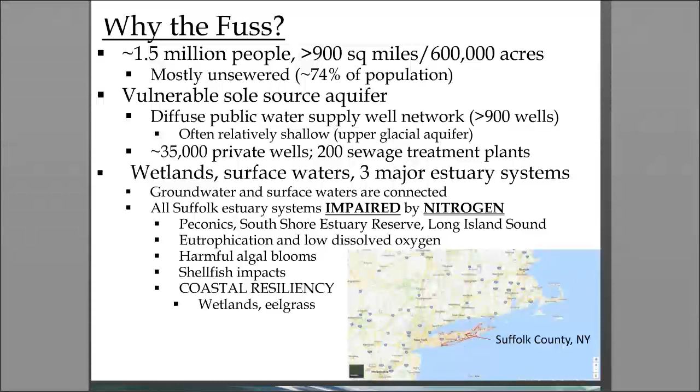And as these articles indicate, Suffolk County was being pushed by both the state and federal governments to move towards sewering of the entire county. And in fact, elected officials at that time began taking steps to move in that direction. Those steps became very complicated for a variety of reasons. One reason was that, rather than just put in place the sewer systems, given the potential cost impacts to homeowners, the elected officials decided it would be necessary to put any proposal for the creation of a sewer district and the installation of a sewer system up to a vote for the county and the affected areas in particular. And their very first effort to do that didn't turn out so well.

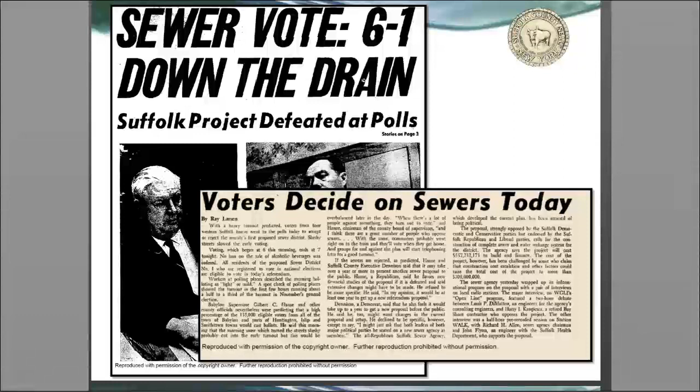It deals with a wide variety of issues. It was completed under the leadership of Walt and his staff in the Health Department, with financial support from the Suffolk County Water Authority and important input from our Department of Economic Development and Planning. It deals with a wide variety of potential threats to water quality. The one we're going to talk about today, and which has been the focus of our Reclaim Our Water initiative over the past couple of years, is the issues associated with nitrogen.

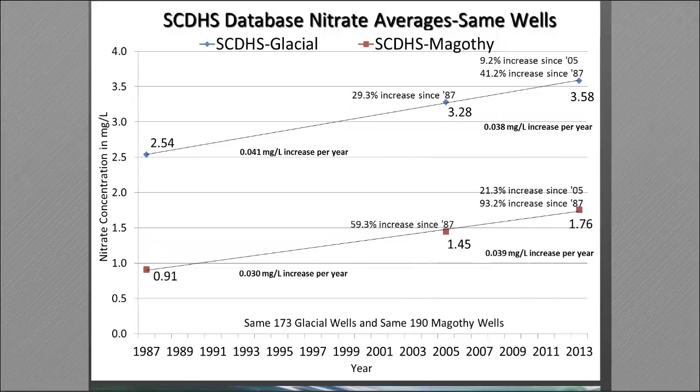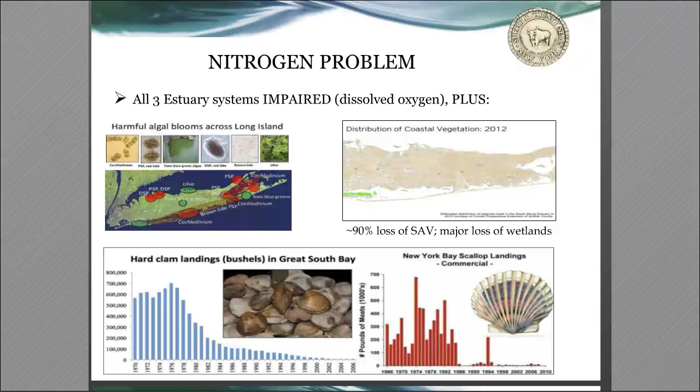Fish kills are sometimes a result of natural conditions, but that fish kill, which occurred in the summer of 2015, was studied by our Suffolk County Department of Health Services and the New York State Department of Environmental Conservation, which concluded that it was a result, at least in part, of increased nitrogen pollution in the Peconic Bay, Great Peconic Bay or Peconic Estuary.

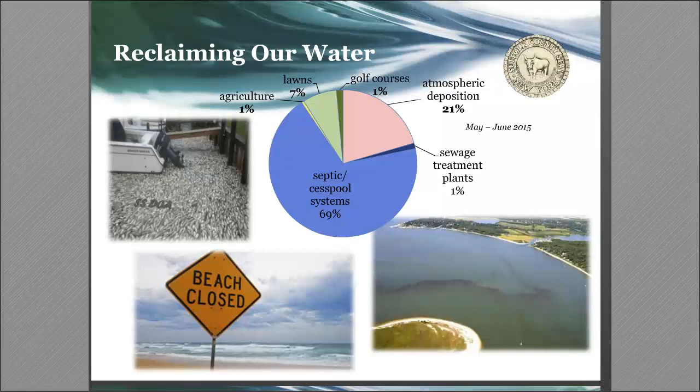And approximately 250,000 of those systems predate a 1973 requirement that a homeowner or a developer install a septic tank in front of a leaching ring in order to provide some pre-treatment of wastewater. So we have 250,000 systems in the ground in residences alone that don't even have the benefit of a septic tank. The numbers are daunting, and sometimes people will question whether or not we could ever really make a difference.

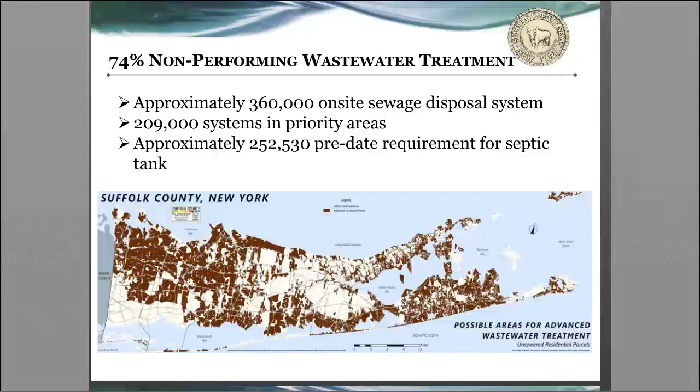The county executive has made clear that what we are going to do is to establish priorities in terms of areas where the use of new technologies will make the most difference and be most cost effective. Walt's going to talk a little bit about that on the sub-watersheds plan, and the county executive has directed that we should make progress each and every year toward that goal, not be daunted by the large numbers.

Or if we have a pre-existing downtown business district where the use of cesspools and septic systems is constraining growth or future development and impacting the environment, we see some interest in providing active sewage treatment there. But for many areas of Suffolk County, which is a very diverse county, a fully developed suburb on its western boundary, and increasingly more rural as you move east towards the Twin Forks of Long Island, which are still very rural. In areas where development patterns are less dense, sewering is just not a cost-effective option.

We find that in some cases the cost to sewer an individual parcel could exceed $100,000, and there's tremendous concern on the part of some of the governments and the NGOs on Long Island that the introduction of sewering to some of the rural areas will actually induce development that would be inconsistent with their land use plans and goals. And in communities like that, the solution, rather than sewering parcels that are now relying on cesspools and septics, is to move instead towards the use of these new innovative alternative treatment technologies, which we'll talk about more in the presentation.

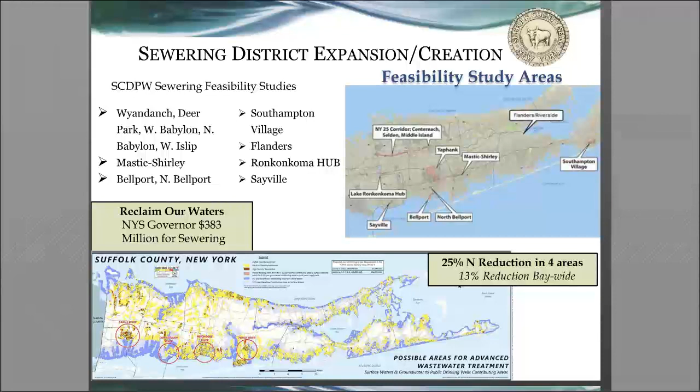So we are advancing some sewer proposals across Suffolk County. And then the map on the right-hand side shows other areas in which there's tremendous interest on the part of the citizenry and elected officials to advancing sewer, and efforts are underway to evaluate that as a possible solution to the wastewater crisis that we're facing.

But IA systems are the real focus of the work that we'll be talking about today. And what I found when I arrived at Suffolk County is that it's not such a simple matter. The county executive quickly realized that in order to put these facilities and these types of systems into the ground, there would need to be a series of steps taken to make sure that the county was successful and that the process would be supported and embraced by citizens.

The very first, on the far left of this slide, is the idea of a pilot program to show that these technologies actually treat wastewater as effectively as advertised. And we'll talk about that in a little bit more detail, but the short story is that the county went out to the industry, to all manufacturers of these systems that they could identify, and basically said any manufacturer can participate in a program. We're Suffolk County. We have 360,000 residential systems in the ground that could ultimately need to be replaced. We're a major potential market for your product. Would you be willing to invest in the future of Suffolk County by donating systems to show that they function the way that you advertise them?

4 manufacturers responded positively to a first round of that program and donated 6 different technologies. The county held a lottery of interested homeowners and put 19 systems in the ground to test those, hoping that after getting 6 months of steady operating data showing they performed down to regulatory standard 19 milligrams per liter of total nitrogen or less, we would certify those provisionally for use in Suffolk County.

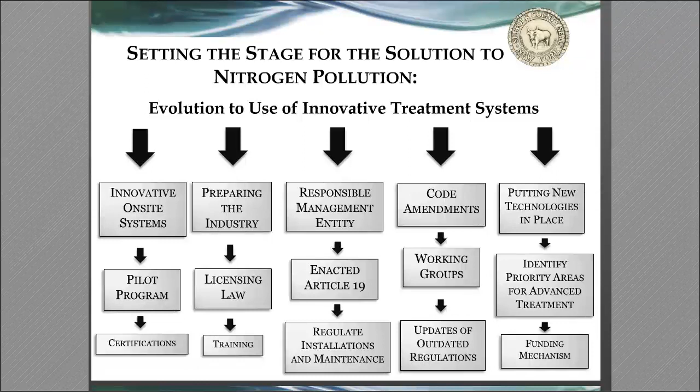So our program is called the Suffolk Cesspool Upgrade Program Enterprise, or SCOOP. And we've been extremely fortunate to get significant financial support from the state of New York. Each and every year, we have been able to rely on them for funding that allows us to employ staff who are administering the programs and to support various aspects of our regulatory efforts as well.

State DEC has been very nimble. Every once in a while, we'll have an interaction with elected officials that causes us to need to pivot quickly and propose to fund something different than what has originally been proposed. And they have been with us every step of the way. We're very fortunate. So this slide just lists some of the things that we have going on, some of which I have mentioned. I'll try and move through these a little bit more quickly.

And now I'd like to turn it over to Walter to talk a little bit about the Sub-Watersheds Wastewater Plan. Walt? Yeah, thank you, Peter, and thank you, Zach and Christina and EPA and everybody for participating. It's an honor to present.

I sit in the Division of Environmental Quality in the Health Department. We've had a long involvement in wastewater under a couple of state codes. One of them is a state sanitary code under state health department jurisdiction. That basically deals with small flows of under 1,000 gallons per day, which is most of what you're going to be hearing about today. We also have delegated authority from our State Department of Environmental Conservation to implement the State Pollutant Discharge Elimination System Program under EPA's Clean Water Act and the State Environmental Conservation Law.

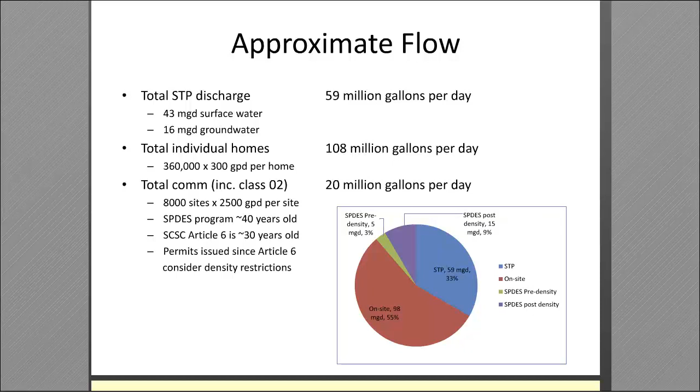The point of the graphic is to illustrate in the red that the great majority of loading is from individual on-site systems and particularly individual residences. There is a significant commercial flow dimension. It's on the order of 10 to 20% of the wastewater, but we're largely a residential community and a residential wastewater generator, and that's the biggest part of the problem that we need to come to terms with.

TMDLs of about 50% for the Sound study were mainly met with point source upgrades. In areas like the Peconics, we were talking about 25 to 50% reductions, mainly from non-point sources, mainly from septics. Those just haven't happened, and they need to.

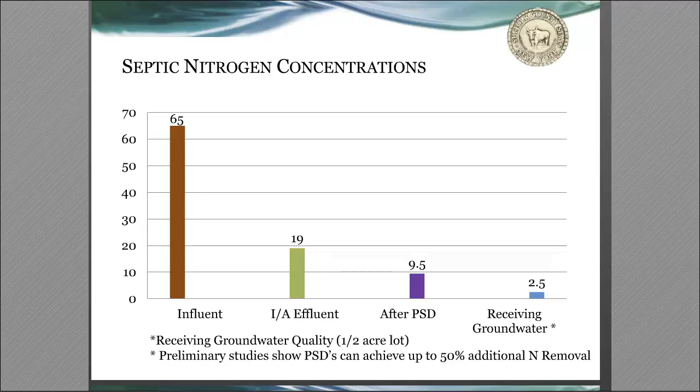This shows what we're dealing with in terms of septic loadings on a concentration basis. Septic tank influent, we rated about 65 milligrams per liter. Innovative and alternative effluent, this 19 milligram per liter number is based on New England standards. It's about a 70% reduction, actually higher because we're seeing higher influent numbers given low flow plumbing fixtures over here. With the pressurized shallow drain field, we hope to cut that in half, which means that in receiving groundwater, we'll be looking at about a 2 to 2.5 part per million nitrogen level, which is pretty consistent with some of the goals in prior studies in the literature to significantly change the trajectory of the loading and the impacts to our surface waters.

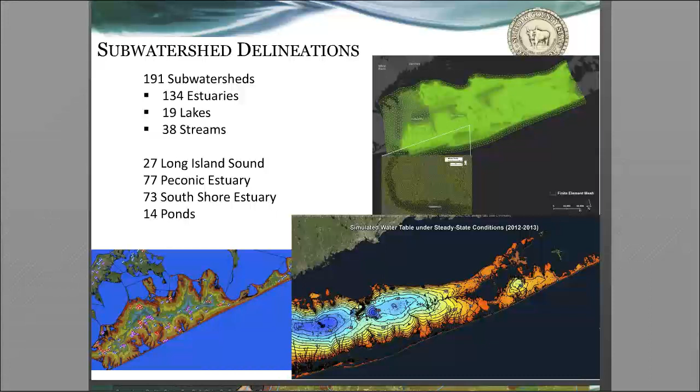Here are some good-looking maps, which are also very useful. The one on the lower left shows travel time to embayments as a function of land and travel time. We have 191 embayments delineated for our three major estuary systems as well as our freshwaters. Zooming into West Neck Bay, which has historically been an incubator for the brown tide, we're looking at groundwater coming in mostly in the 0 to 2 and 2 to 10 year travel time, which is the red and the orange. The model has the capability, and it's used to overlay each and every parcel and assign nitrogen loadings to it in existing and future scenarios.

It also partitions volumetric flow rates of groundwater inflow and nitrogen loading. So right now our assumption of 25-year travel time is being the most sensitive, with an aggregation of a number of these subwatersheds where we found that most of the groundwater and nitrogen to our sensitive bays came in within a 25-year travel time.

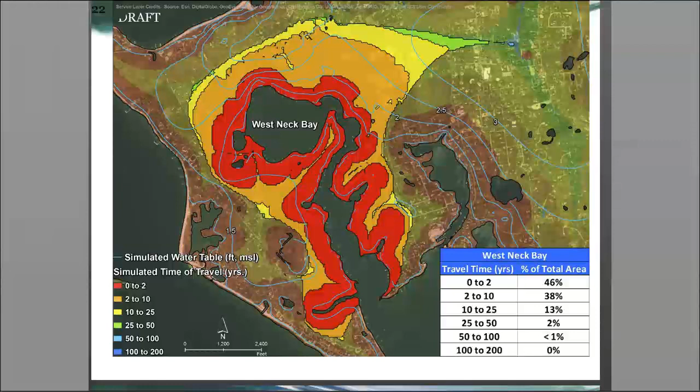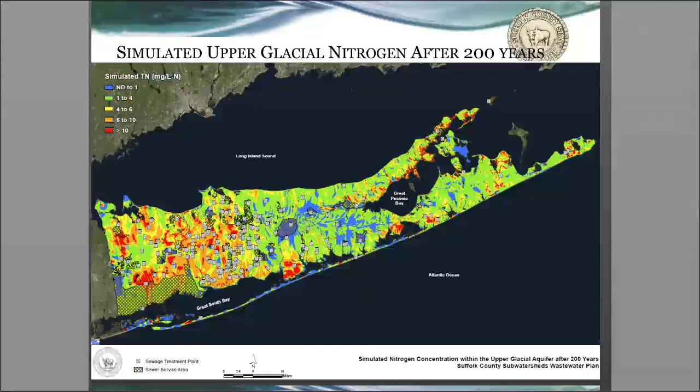Suffolk County developed largely between the 50s and 70s with exponential land use and residential unsewered development. We thought that by now some of the nitrogen concentrations would be leveling and flatlining, given that 50-year travel time. There's still enough residual legacy and new nitrogen coming into the system that hasn't happened. Nitrogen rates are continuing to go up, which, as Peter mentioned, is a huge concern.

I wanted to mention a word. Peter mentioned DEC's leadership and support with respect to grant funding and the Nitrogen Action Plan. EPA has been a huge leader with management models and case studies. They've led the Sound Study as well as the Peconic Estuary Program and funded various demonstration programs and wastewater management programs throughout the Mid-Atlantic and New England.

The Chesapeake Bay Data Sharing Agreement was an important seminal model. We've recently established the New England Long Island Data Sharing Agreement, which is going to give us better access to data and swifter approvals of technologies, which has been one of the rate determiners in getting this program to progress.

The Nitrogen Sensor Challenge is another important initiative led by Christina Heinemann and Maggie Thoreau and others at EPA. They've recently identified several winners in their phase 1, which are being tested in Massachusetts and are going to be purchased and used in Suffolk County. To reduce cost to the industry, it could save $50,000 or more that a company would otherwise have to invest in getting a technology from provisional to general use approval.

It's going to improve the quality of data, streamline reporting, and provide real-time information necessary to enhance performance. So we're very excited about this project and look forward to it moving forward.

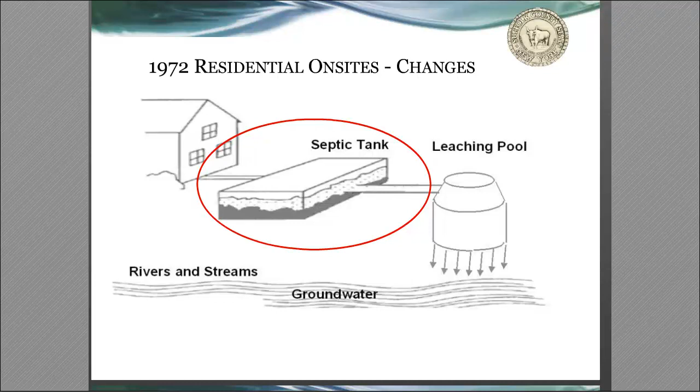They cave in. They do very little to treat wastewater other than converting ammonia to nitrate when they're not sitting in groundwater. Adding a septic tank was basically primary settling and treatment and retention of solids. Between 1972 and 2016, this was really the only option for residences without sewers available to them. Peter, did you want to pick up the sanitary code changes?

All right, Walt, thanks for that. Thanks for handing it off.

So, yeah, I had mentioned earlier that one of the things we needed really to do to lay the groundwork for an evolution away from the use of cesspools and septics to these new technologies was to designate our Department of Health Services as a responsible management entity, and the addition of Article 19 to the Suffolk County Sanitary Code in August of 2016 accomplished that, and also established a performance standard for IA systems of 19 milligrams per liter.

That was an important step, but we have a lot of other steps to take because as things stand, the sanitary code still allows the installation of traditional conventional septic systems for single-family development. But Article 19 was an important step. As I indicated, it did a number of things for us, as indicated in this slide.

It authorizes our department, importantly, to promulgate procedures, protocols, and standards, which they've been doing ever since Article 19 was enacted, and empowers the department to oversee installation and maintenance, and we have a lot of things underway trying to give life to that responsibility. We'll talk a little bit about our longer-term plans for a kind of a computerized system for reporting. It's very exciting. It's a very big deal.

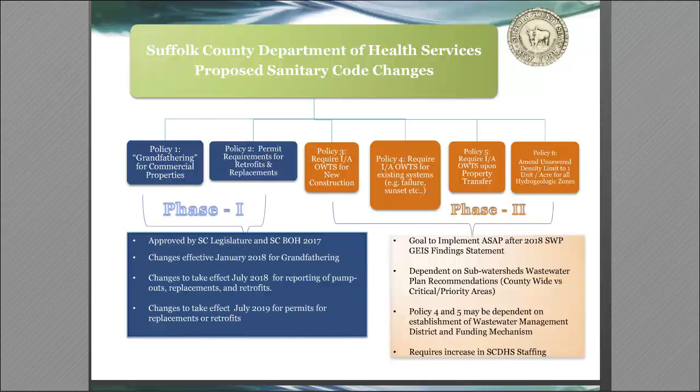One of the things that our first phase of modification of Article 6 did was to kind of restrict the way that we deal with pre-existing non-conforming flows. Walter and his staff kind of pulled apart the past practice of the department and the applicable regulations, didn't really like what they saw, and so we were able to include some modifications to what we call the grandfathering provisions in the update to Article 6 that was approved by the legislature. Walter felt very strongly about that, and it was supported by the Long Island Builders Institute, which we were pleasantly surprised.

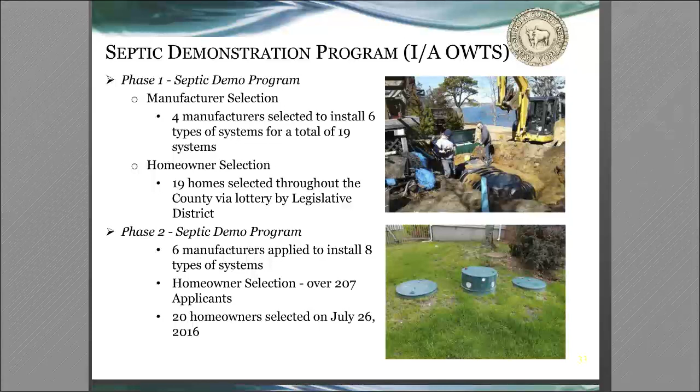So as Peter mentioned, between phase 1 and 2, we have 14 different technologies which are being tested. We're also testing a pressurized shallow drain field, our first effort at horizontal leaching in the shallow zone with enhanced wastewater treatment for nitrogen and other contaminants. So far, we have 3 experimental systems. We have 5 provisional systems approved, which is really the important thing.

Out of the 14 systems that came to us to be demonstrated, we set up challenge performance criteria. They needed to come to steady state. We needed 6 months of performance data. We needed to be sure that their engineering report was acceptable, that the community was capable of installing, operating, and maintaining those.

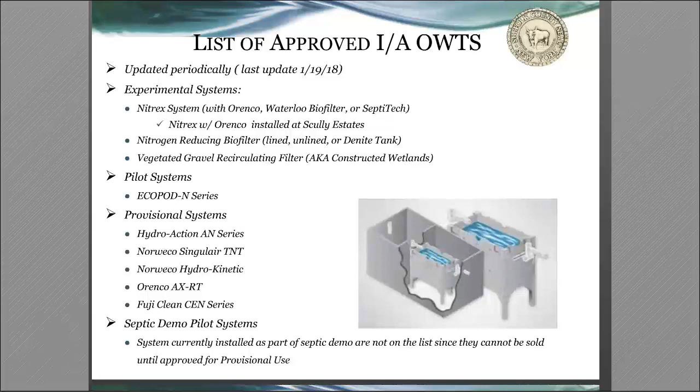5 of those, a HydroAction, 2 Norwecos, an Orenco, and a Fuji system, are already certified for provisional use, which means that as long as they continue to perform, there's no limit on the number that can go in the ground. If there's any problem, we can obviously suspend approval for installation. That hasn't happened yet, and we don't expect it to happen. The other 9 systems are still in the process of being vetted.

So here are the 5 systems that were approved. These are all biological systems. There are systems out there that rely on more chemical and physical processes. These are fairly conventional mini sewage treatment plants, ammonia to nitrate in the presence of oxygen in a food source, then again nitrate to nitrogen gas in the presence of anaerobic denitrifying bacteria.

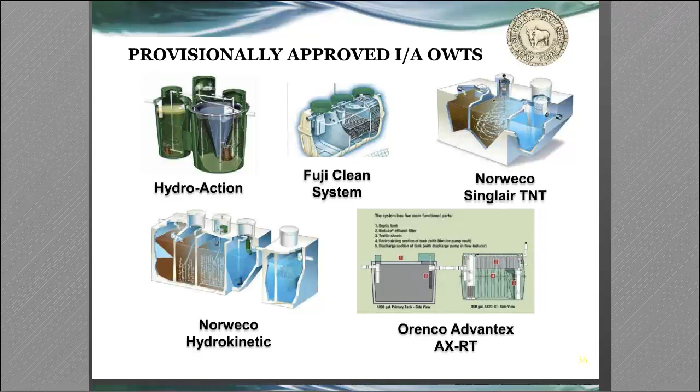Some of these are recirculating systems. The HydroAction, the Orenco and the Fuji all recirculate back to a septic tank or a septic chamber with an anoxic food source. Others, like the Norweco, are basically pass-through systems which are sequencing, adding oxygen to aerate, and then allowing the liquid to go through an anoxic phase to denitrify.

All of these met our challenge standard of 19 milligrams per liter. The HydroAction was best at under 12. The others came in at roughly 17 to 19. Our numbers are really going up. We went from tens of systems to hundreds of systems with our septic incentive program that Peter will talk about.

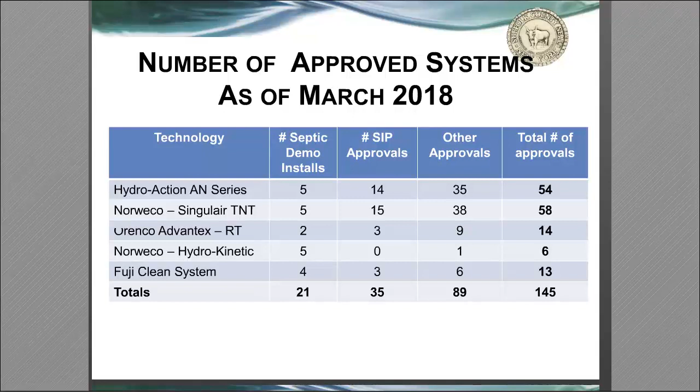We also have jurisdictions that are jumping the gun and requiring these systems in townships like Brookhaven, Southampton, and East Hampton for new construction. We've got almost 150 of these approved, and with the New York State expansion to the Septic Improvement Program, we hope to very quickly be going into the range of 1,000 or more systems a year.

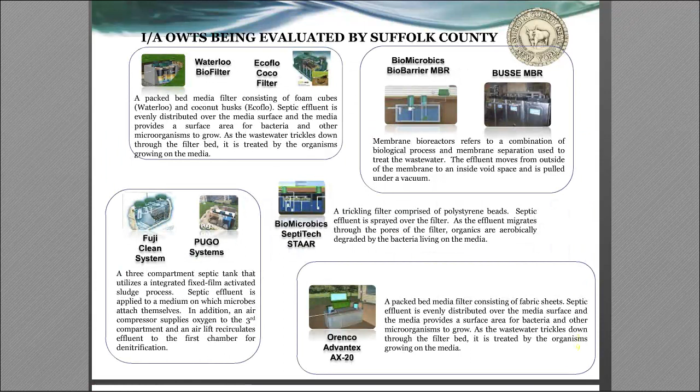Here are some of the other systems dealing with packed bed media, membrane bioreactors, trickling filters, as well as integrated fixed film activated sludge. I know that we're running behind, so I can't spend too much time on this, but I'd be happy to answer questions. Of the 9 systems that are outstanding, we think that 4 of them will be approved by the summer. The other 5, hopefully this year.

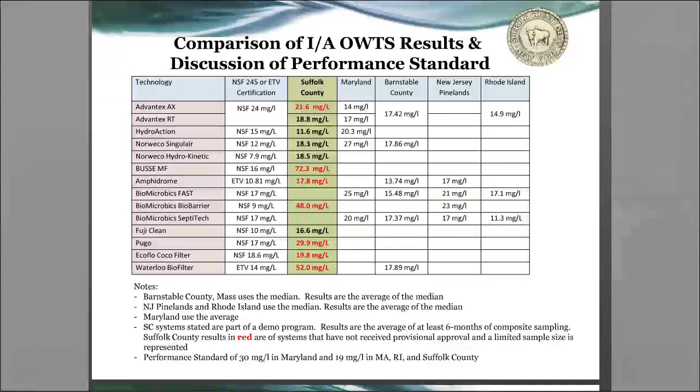Can't really project when. This chart shows that we've been called upon to take great scrutiny on the numbers. The legislature required us to do an annual report on these. We're looking not only at our performance in relation to the NSF certification, but also the 4 other proximate Mid-Atlantic and Northeast jurisdictions to make sure that we have a good handle on how these systems are performing and that we continue to improve performance moving forward.

With that, I'll turn it over to Peter to discuss the Septic Improvement Program. Thanks, Walt. I'll try and move quickly. So, the county executive is kind of a grand visionary here, and in addition to pointing out the importance of standing up the industry, he has always said this will never work unless we can make it affordable for homeowners to make the change. And he, about a year ago, pushed us to create a combination grant and loan program to incentivize the installation of these IA technologies by homeowners.

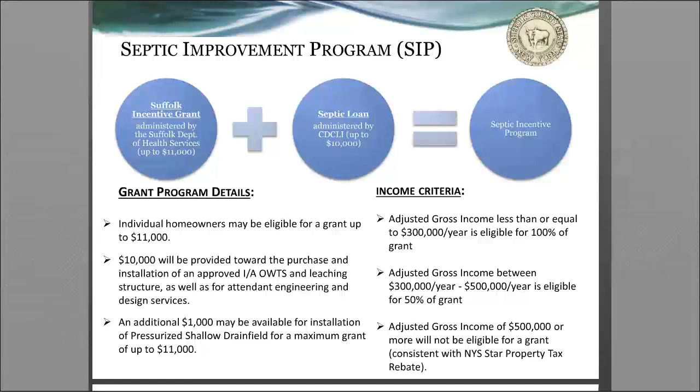I'll just zip through these. You don't need to see him signing the law, but we signed the law in the end of May. Real quick on the grant and loan program, the voters of Suffolk County in 2014 approved a referendum that included a modification of the county charter that provided us with $2 million a year through 2021 for the installation of nitrogen-reducing systems, providing a source of funding for a grant program, which gives us $2 million a year, and our program allows for grants of up to $10,000 plus $1,000 if you're interested in installing a pressurized shallow drain field,

coupled with a low-interest loan that will allow homeowners to finance the remaining homeowners' share of their installation using non-governmental resources. We went out to funding organizations, philanthropic organizations, and were able to generate enough money to create a loan pool and to obtain a $1 million zero-interest line of credit from a local bank. We have an outside group, a not-for-profit called the Community Development Corporation of Long Island, administering a loan pool to allow folks who participate in our grant program to obtain financing to stretch out the cost of the homeowner share over 15 years at 3%.

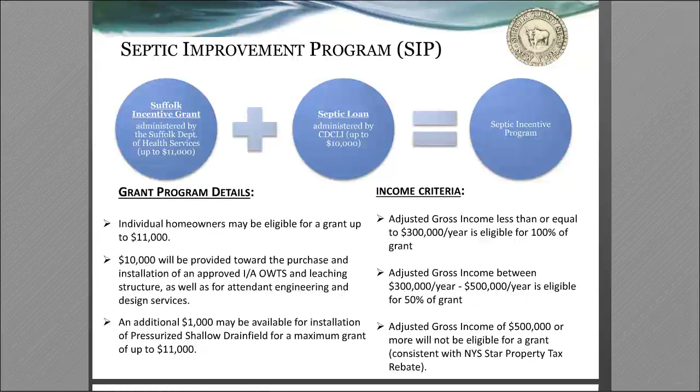Basic numbers. So the county executive was adamant that our first effort to try and administer a program should be narrowly drawn so that it would not be overwhelming. So we put in place criteria to make it easier for us to manage. It has to be a single-family home. Obviously, it has to be served by a cesspool or septic and not a sewer district. Can't be a rental, can't be new construction, can't be a business in the home. Political officials are not eligible. And obviously, you have to have a valid certificate of occupancy.

We have a very sophisticated application process. It's an electronic process designed by our own Department of Information Technology that allows people to apply electronically, upload all the necessary documents, create an electronic signature to certify what they're submitting and get going.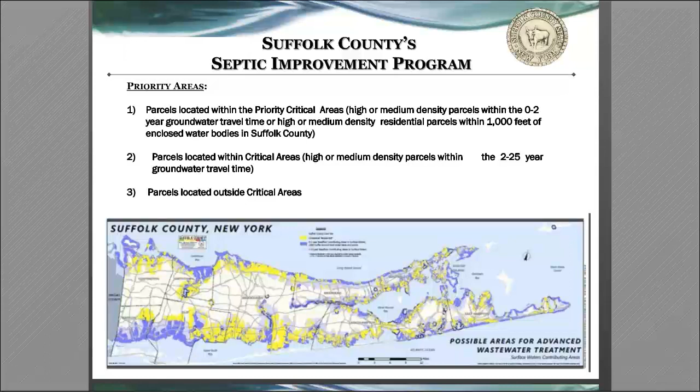The program places priority in the scoring, provides additional points for sites that are in close proximity, where groundwater travel times are low, or within 1,000 feet of enclosed water bodies. A second category is parcels located within critical areas within 2 to 25-year groundwater travel time, and then everybody's eligible, but they just don't score as high. It's part of our effort to put these systems where they're going to have the most benefit. So we have a ranking and scoring process that I don't think I have time to run through, but we have a very well-established point system that can withstand scrutiny and is easy to understand. The program has been going very well.

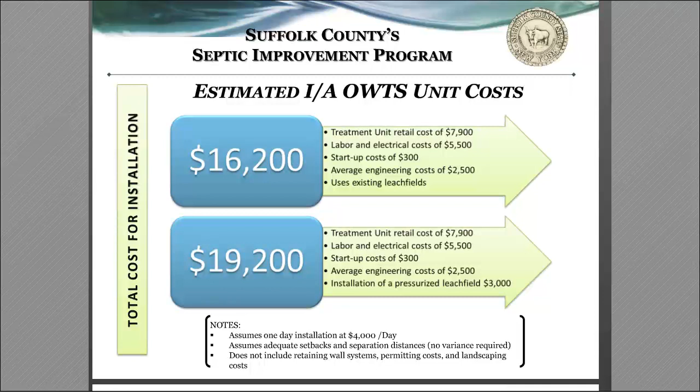So here's some of the cost information we have been providing to homeowners as we explained the program and were initially rolling it out. Our goal had been to keep the cost of the system installation at below $20,000. You see two options here. In some cases, folks can use their existing leaching structures with the new system. You simply install the treatment works in advance of your leaching system and leave the existing leaching rings in place. That's a more cost-effective solution, obviously, but in situations where you need to install leaching, we think you can still get a system in the ground for less than $20,000.

We found pretty quickly that if we left market forces to dictate costs to homeowners, we would have a problem. We had a board member from one of the funding agencies go out and get a quote for a system, and he got a quote of $32,000, far greater than what we had told him he could expect to pay. We learned quickly from the people we've been working with in the state of Maryland who have the Bay Restoration Program that there's a way to control that. We followed Maryland's example. We went out to the manufacturers and asked them to quote fixed pricing for the installation of these systems, told them what our goal would be of keeping the pricing under $20,000, and we offered that opportunity to any manufacturer or their local rep. You could either participate or not.

Another aspect of our program that is unique to New York is that the plans for these systems need to be stamped by an engineer or an architect, which is an additional cost that we're dealing with. It adds about $2,500 to the cost of the system. We've been pushing the state for some way to provide relief on that requirement.

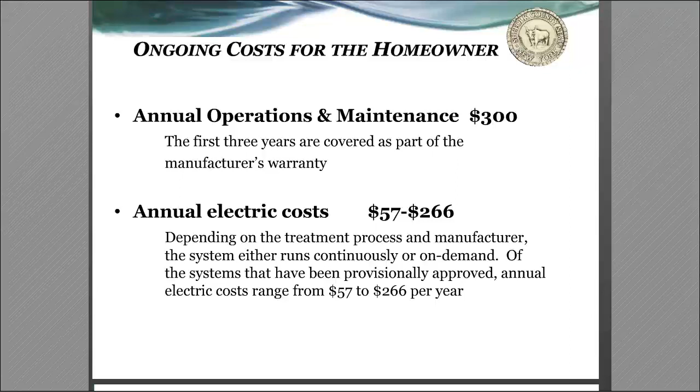Some of the costs we talked a little bit about. I saw there was a question. Operations and maintenance, ballparked at $300 a year. Electrical costs could range from $57 to $266 depending on the system.

Here's how a theoretical participant could benefit from the program. Assuming that an installation was going to cost $17,850, the homeowner receives a grant of $10,000, leaving a remaining homeowner share of $7,850. If they take advantage of the low-interest financing aspect of our program and borrow that amount at 3% over 15 years, they'd end up paying $648 a year or $54 a month.

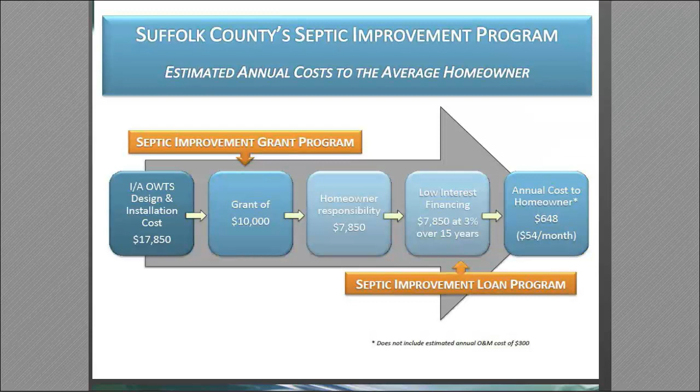And as the county executive is quick to point out, if a homeowner is facing the need to replace an existing system and may need to reach into their pocket for a $6,000 cash outlay at one time, this might be a desirable option. And we were interested in seeing what kind of response we would get once we rolled the program out. We really couldn't say. We did some town hall meetings to explain it before it was enacted, but we didn't know what kind of volume we were going to see.

So we have been paying the grant directly to the vendor installer. There's sign-off by the grant recipient homeowner, but we like to make the disbursal directly to the design professional who does the design and the vendor who does the installation only after we've confirmed that the installation has been successfully completed.

We are aware that in some cases homeowners require permits from other entities, such as the New York State Department of Environmental Conservation, and so we approached DEC and asked if they would work with us to standardize that process to make it easier for applicants, and they created a standard activity permit for us for alternative septic system installations in Suffolk County. We couldn't be more thankful for that.

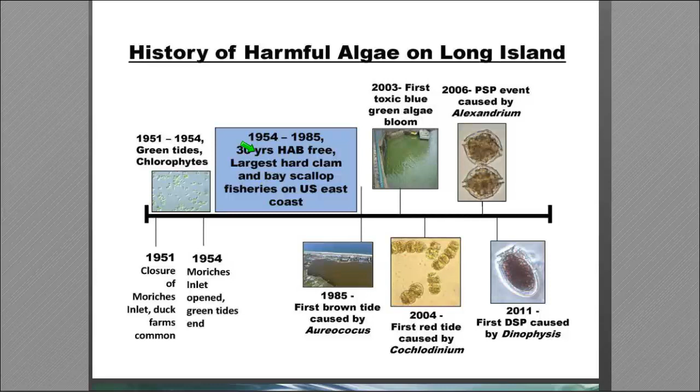As Peter mentioned, we have a growing harmful algal bloom problem in Suffolk County. Dr. Gobler, who is one of the foremost national experts, happens to live in our backyard. He produced this slide, which showed that for 30 years we had the largest hard clam and scallop fishery on the East Coast without any HABs. First we had Aureococcus, a brown tide, then the blue-green algae, cyanobacteria reared its head, then a couple of red tides, PSP, DSP, and C. poly, a rust tide came. So we have at least 5 and counting. There's a couple of others that show up seasonally as well.

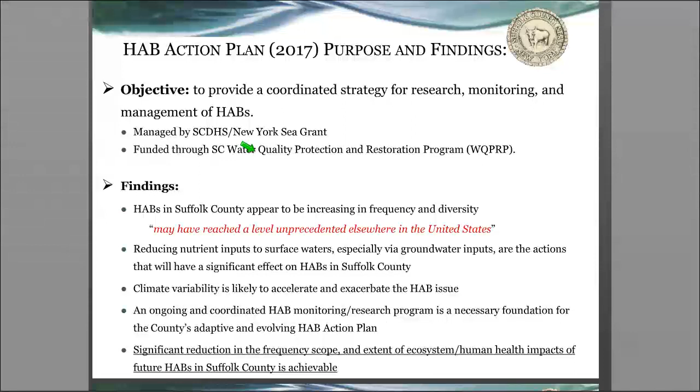It's a growing issue, and there was an acknowledged need to have a coordinated strategy for this. We held a symposium in 2016, put out a report in 2017, which concluded that we may have reached a level unprecedented in terms of frequency and diversity in the country. Climate variability is certainly a factor, and it may accelerate this, but reductions in scope and extent are possible, particularly with nutrient reductions. There's a whole host of recommendations. The plan is on our Reclaim Our Water webpage. We'll be doing an annual symposium. Next one is going to be coming in May. Look out for the notice.

Dealing with management and nutrient reductions, monitoring. We're going to start looking for diarrhetic shellfish poisoning toxin. We hope to establish a website where people can provide real-time information and get near real-time information about where these HABs are, and a number of different research priorities, which have been relatively underfunded in recent years. We have hit our deadline, and Peter has the final thought of the presentation.

I don't know about the final thought, just that the leadership of the county executive has made a huge difference here. During the years I was at DEC and working with the NGOs, we were just waiting for an elected official who was willing to kind of take the mantle. And all the work that we've been briefing you on is really a result of this county executive guiding and supporting what we're doing. So thanks. We're happy to try to answer questions.

All right. Thank you, Walt and Peter, for that very informative presentation. What you all have accomplished in Suffolk County can definitely serve as a great resource for the localities across the country. So we've got a few questions in the chat box, and I'll read those off, and either of you can answer. The first question is from Abe.